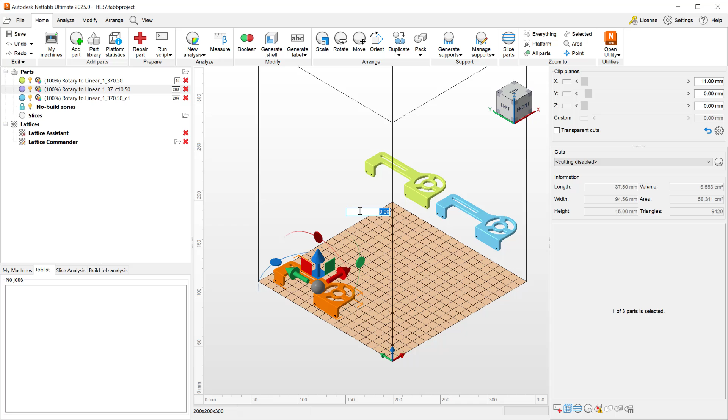The 2025 version of Netfabb has several improvements around how we move parts within the build volume. Here, I have a single part, and if I want to move it, I can use the arrow icons or the circle icons to translate or rotate my parts. After selecting the arrow, I can type in an absolute value, press enter, and my part is moved in that

direction. Another option I have to move my parts is by selecting them, going to the Arrange tab, and pressing the Move button. This brings up a new dialog where I can enter an absolute value or a relative value to translate or rotate my parts. Here, I'm typing in 25 in the Z, pressing apply, and my part is moved in the 25mm Z direction.

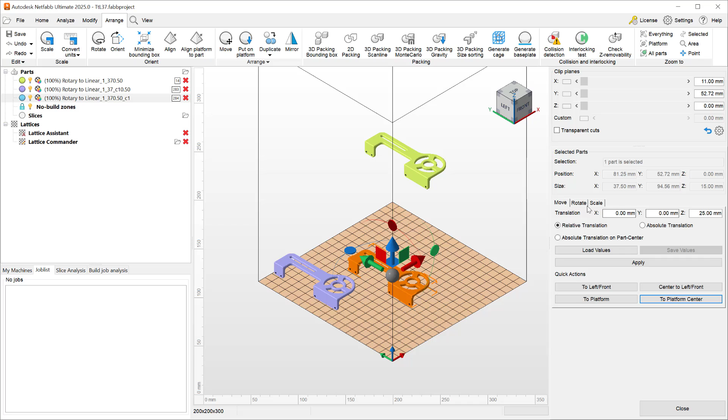The Move menu also has some quick actions, which allows me to select the part and move the part directly to the platform, or to the platform center, for example. These are great tools to be able to quickly translate my parts to the desired location. However, in the past, they were only available within the Move dialog.

With the 2025 version, we added those same quick actions to the Arrange dropdown. Now, you can select the Arrange dropdown and move your parts to the platform, or move them to the platform center, or move them to the left front view of the part. By making them available within the dropdown of the Arrange panel, it gives us the ability to go to Settings, go to Custom Menus, and create a new custom menu.

I'll name this menu a new name. We'll just call it Custom for now. Select OK. And then we can add a new panel. Let's just call this Move. And within this new panel, we can go to the Arrange, select the Arrange panel, and choose the desired options. So let's say we want to select these 4 and hit apply. And now my custom menu has a direct access to those move options.

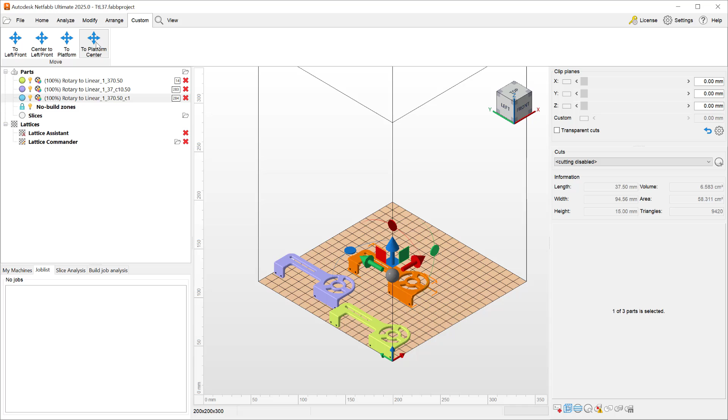I can select my part and I can go and say move it to the platform center without having to navigate into the Move menu. I can use my custom menu to move my parts. Another option I want to highlight is how to use keyboard shortcuts to move our parts.

If I look at it from the front view and select this part, I can show you that I used to be able to move my parts using the page up and page down commands, as the Shift Page Up and Page Down allow me to move the parts in the Z direction. This is controlled in the settings.

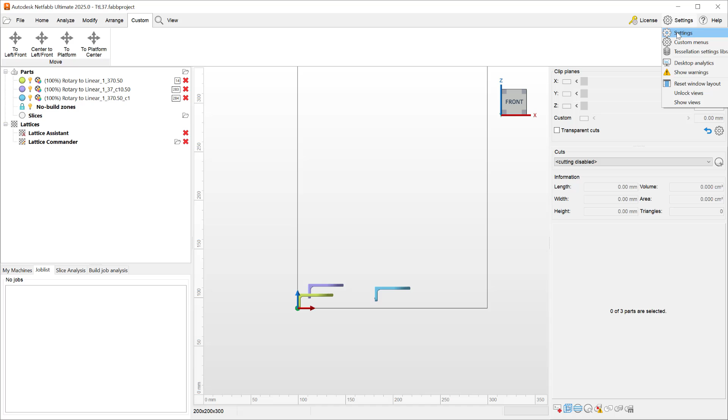If I scroll all the way down to the keyboard shortcuts, go to the default section and scroll down, you can see that Shift Page Up controls the translation in the positive Z direction, and Shift Page Down controls the translation in the negative Z direction. These are just some keyboard shortcuts to access move in certain directions quickly.

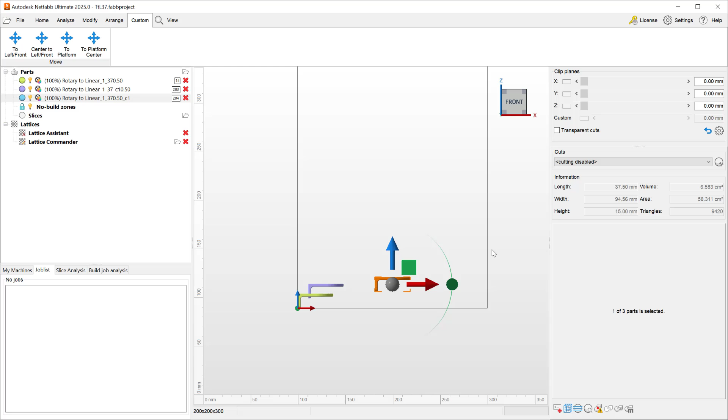With the 2025 version, we also enabled the translation stepping. So if I want to move with increments of 10mm with each keyboard action, I can do so by typing that in and hitting save. And after selecting my part and pressing Shift Page Up, now my part moves in the Z direction with an increment of 10. This allows me to control the position of my parts more effectively and gives me better control over how I position my parts for 3D printing.